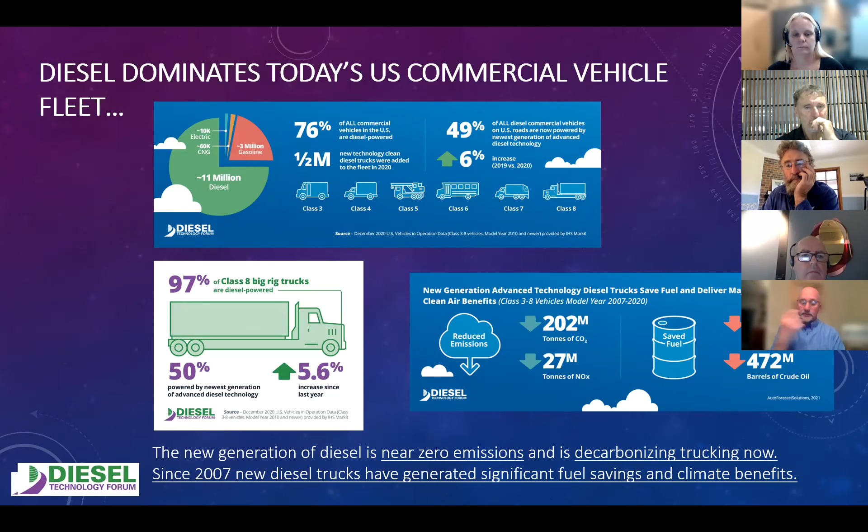So the benefits of new technology that are being delivered to society, as well as those who are using the technology, are significant. And we try and think about those in interesting ways. That's one of the fun parts of our job here.

For example, we can say that all these new diesel trucks are the equivalent of removing the CO2 emissions from 43 million passenger vehicles from the road for a year, or making those all zero emission electric vehicles. Or it's equal to a wind farm with 42,000 turbines, about 5 times the size of Washington, the nation's capital.

So when we think about getting solutions for climate change and CO2 reduction, we encourage folks to think about, we should value all of these reductions, no matter where they come from or in what form. So using the most advanced diesel technology does deliver some pretty significant benefits.

So let me focus a little bit more on the ag sector. I know that's one that you're particularly interested in. And we've already covered a number of the different aspects of diesel's role in the ag sector, and they're, I think, probably very much aligned between our two countries.

Not only in producing the feedstocks and the harvesting and planting of the crops, but transporting of the product, pumping of the water that's needed, and throughout the entire supply chain, diesel has a key role, whether it's moving the grain from the farm elevator to the grain storage facility, to the rail yard, to the inland waterway barge, and so on, and then ultimately to grocery stores around the country.

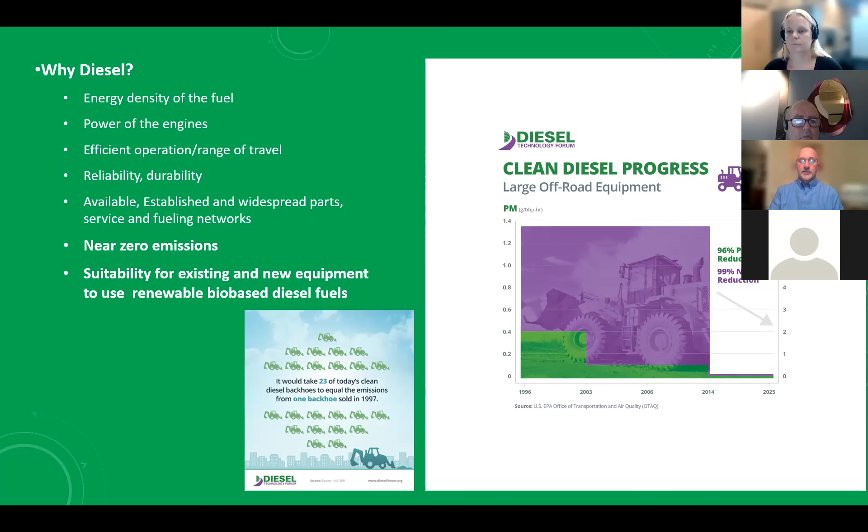And just to put that in perspective, it would take 23 of today's diesel backhoes, or kind of a medium-sized row crop tractor, to equal the emissions of a single backhoe sold in 1997. So you start to get the sense that, wow, the technology has really changed over time, and that is exactly right. That value proposition is one that we have to also remind folks of on the on-highway side.

We have over 140,000 stations in the U.S. that have diesel fuel available, and we have this whole deal with compatibility with these renewable and low carbon fuels. And there are some other attributes as folks are looking at different ways to decarbonize transportation, and particularly trucking gets into the mix there. So the value proposition for diesel is very hard to beat.

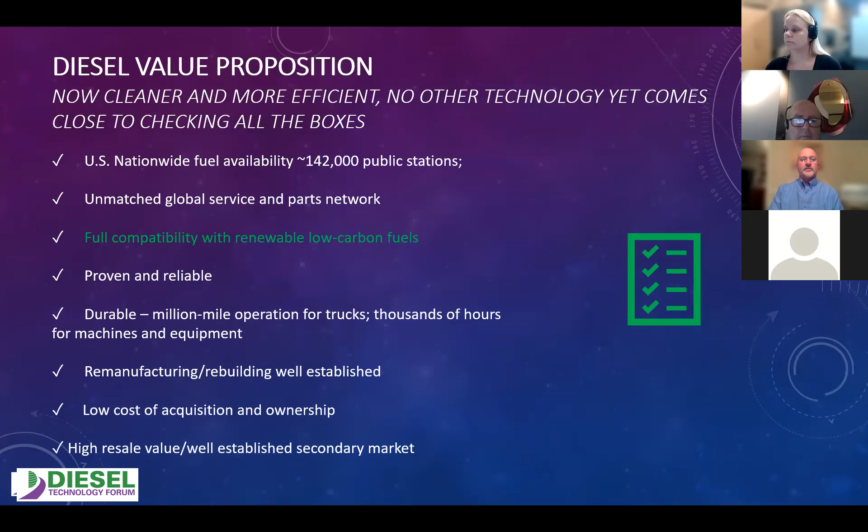As I like to say, it checks all the boxes of what people need today and what they're planning for in the future. Now, turning to that future, though, we all are understanding that some new fuels and technologies are emerging.

For the ag sector, we know that diesel is the prevalent fuel today, but in the future that's likely to change to some extent. What are customers requiring in the ag space today? The same things they've always required: I have to have fuel to do my work, fuel that's affordable, and a way to run my machines and equipment to do my business, whether it's planting crops or harvesting. There's a whole range of requirements customers have and will continue to have in the future.

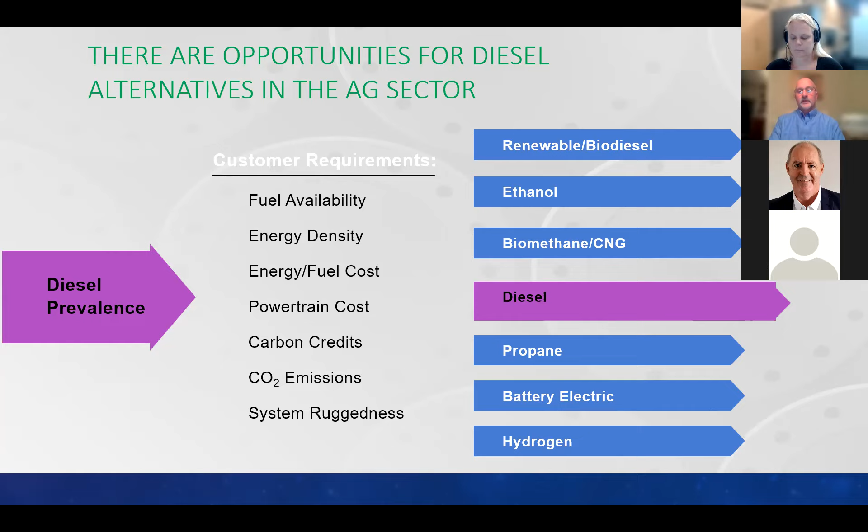So what are the three things driving diesel forward today? This is not just in the US, but globally. First of all is greater efficiency. We're seeing a tremendous effort to make current diesel engines even more efficient.

That's because of new requirements on greenhouse gas from EPA and the Department of Transportation, directing further improvements in fuel economy from heavy-duty vehicles. We're in the second phase of that now. It's happening. It's real savings for real truckers.

And we're seeing some breakthrough kind of things. For example, just last fall, a joint industry-government partnership known as SuperTruck achieved a 55% brake thermal efficiency in the laboratory, which is a pretty significant accomplishment. That means 55% of the energy used in a diesel engine would be applied to useful work, as opposed to lost to heat or some other waste stream. Considering that gasoline engines are in the 30s or so of brake thermal efficiency, it's a pretty big deal.

So we are seeing continued investment to make the combustion process in diesel engines and vehicles more efficient. The second aspect of getting to the future is lower emissions. It's not good enough to be near zero - we're going to be even nearer to zero, and that's coming in the not too distant future here in the US. This may have other ramifications on a global basis.

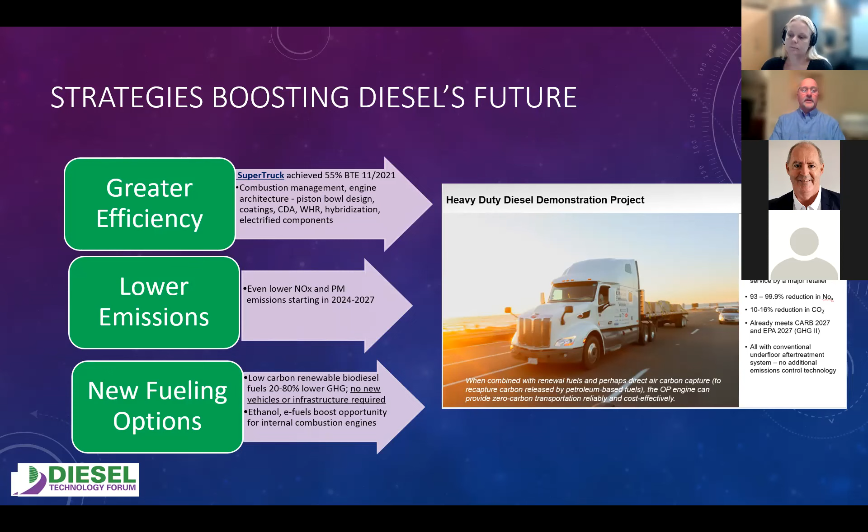And then lastly is these new fueling options. So that's about how we make the diesel engine better - we know how we're doing that in the engine, but what about the fuel? The diesel fuel has not changed in the US since 2006, when ultra-low sulfur diesel was first introduced. So I think there's a tremendous opportunity on the fuel side here that we haven't fully realized yet.

So let me spend the balance of the time talking about renewable fuels and give you some perspectives that we have here in the US on that.

So why are people more interested today in renewable biodiesel fuel than ever before? I'll state some of the obvious, and I'll be interested in your comments and perspective as well. First and foremost, we are all part of the team to decarbonize our global economy and attack the climate change challenge. Here in the US, our president has set a net zero carbon emissions by 2050 goal. And our transportation sector is now number one in greenhouse gas emissions.

Not only has transportation emerged as a big part of the pie, but federal policy is very clear at this point, and we also now have a number of states adopting their own goals. For example, New York State has set their own goal of 85% reduction in greenhouse gases, and probably a dozen other states have done the same. So we're seeing a very activist policy climate here.

We also have the influence that is growing throughout the world for our member companies, and that is the corporate environmental, social, and governance efforts - the ESG concerns - as investors and public interests start to ask more questions about how specific businesses are managing the climate risk within their portfolio and how they're reducing their impact on the climate.

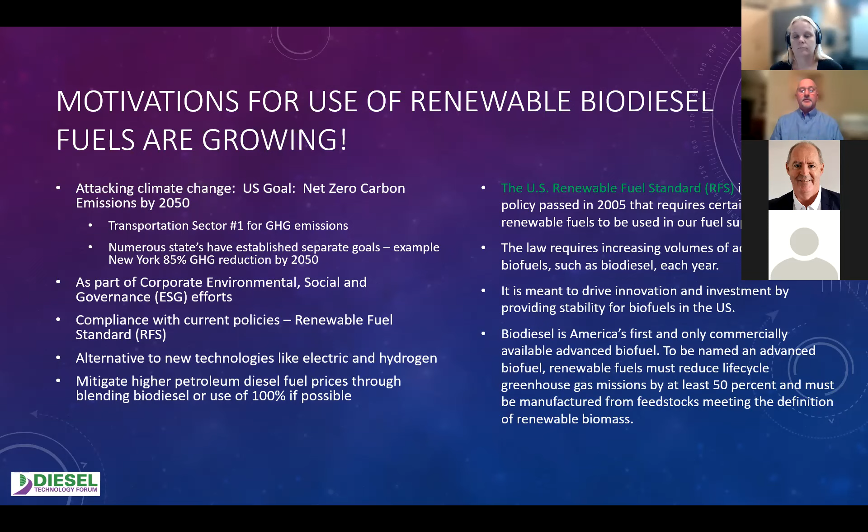The last thing here, and the most recent one in present day, is using more biofuels mitigates the higher diesel fuel prices we're all experiencing because of some of the issues evolving out of Ukraine, the war with Russia. Part of that is driving up energy prices, and diesel fuel is top of the list there. We're seeing diesel fuel here in the US at over $5 per gallon, the highest we've seen on record. So it's got a significant motivating factor there. One of the solutions to that is to use more renewable fuels if you can. So these are the main motivating factors for getting folks towards renewable fuels.

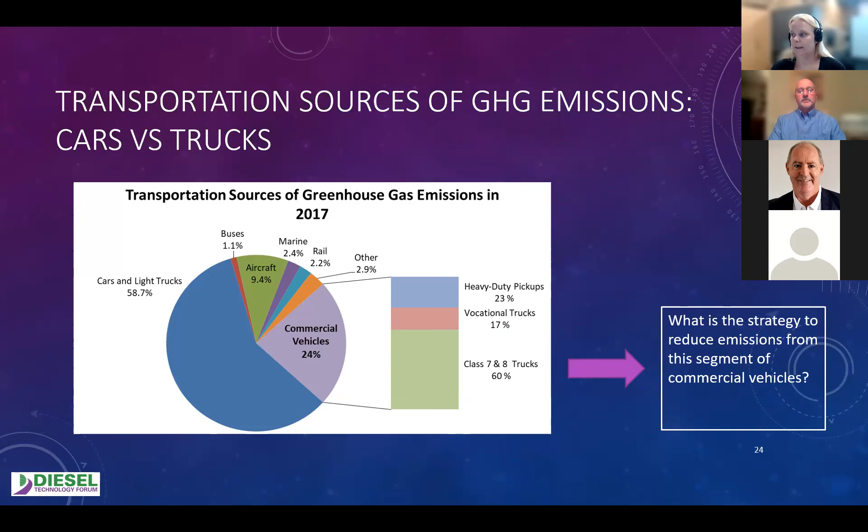If we dive into our sources of transportation emissions a little further in the US, you get the sense that heavy duty trucks are a big part of that. The off-road engines and equipment are also a part, but a smaller part. And that's why there's been so much of a focus on electrifying the heavy duty vehicle fleet in the US, because it is the largest single source outside of passenger vehicles of CO2 emissions.

Just 2 years ago, transportation surpassed electricity as the number one source of greenhouse gas emissions. So all these things have come together to compel progress here in the US on reducing greenhouse gas emissions. The Biden administration has a 50% reduction in greenhouse gas by 2030, and then the net zero carbon by 2050 that I mentioned before.

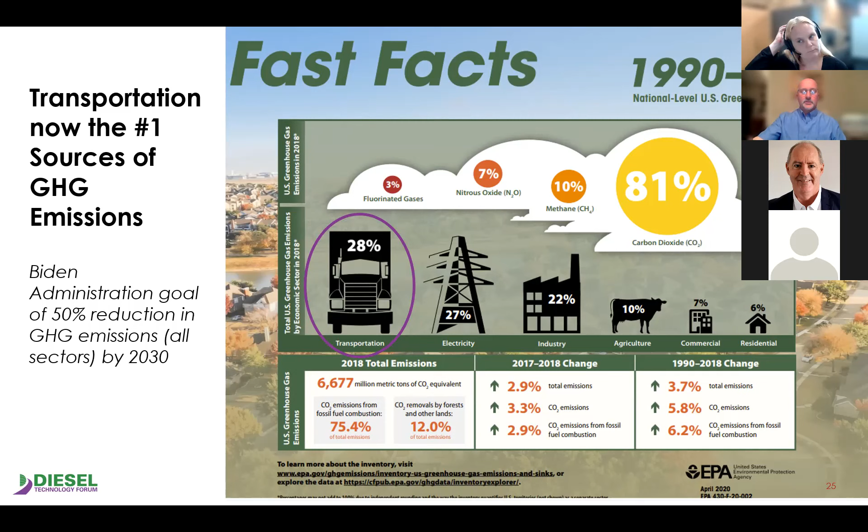So what is the opportunity for renewable fuels? When we think about these fuels here in the US, we think about how they can reduce greenhouse gas emissions pretty quickly by a range of anywhere from 50 to 85%, depending on the feedstocks that are used to produce the fuel. And just to level set everyone with what we're talking about, the feedstocks principally are animal fats and vegetable oils.

These are the same, but the processing is different. And that's where the divergence takes place between what is traditional biodiesel on the bottom, which results in the fatty acid methyl ester, the FAME kind of fuel that we talk about, or the renewable hydrocarbon diesel depicted on the top line, which is a non-esterified renewable diesel product. It's a very paraffinic kind of fuel, and is what we consider to be a drop-in replacement for conventional petroleum diesel in the US.

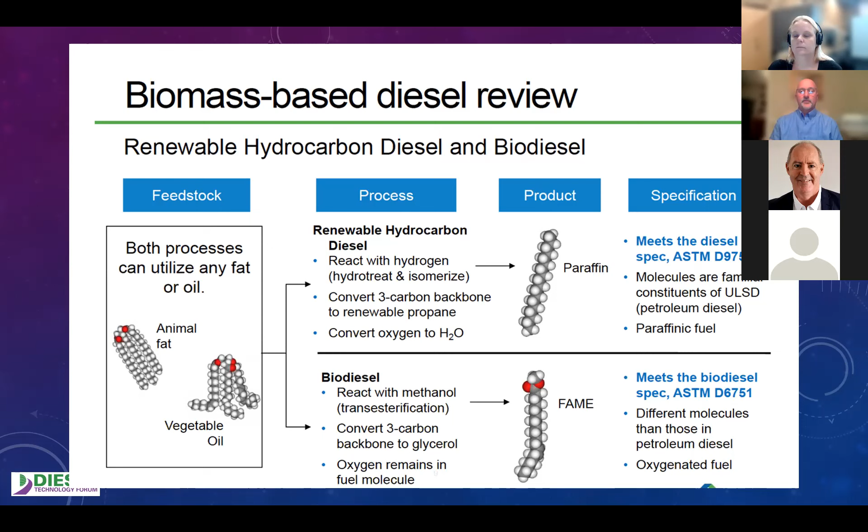Now, I'll give you a glimpse of what we're seeing here in the US, what the production, feedstocks, and markets are looking like, what folks are interested in. On the production side, last year, about 3 billion gallons of biodiesel or renewable diesel were produced. They had a capacity of slightly more than that. The industry's expectations are that this is going to grow to nearly 5 billion gallons by next year, and that's I think a pretty reasonable estimate.

You get a sense of the feedstocks here, that soybean is making up the largest portion of the biodiesel, renewable diesel feedstock at just more than half of all of it. And then the balance make up the feedstocks almost equally. I'll share some more insight on that in a second.

The markets in the US for renewables are anything that can burn diesel fuel. And we haven't, I would say, necessarily, with the exception of the states with the low carbon fuel standards, we've seen renewable diesel fuel used in all kinds of different applications, and I'll share some insights on that in a second. And the policy drivers we've talked about a little bit: the renewable fuel standard that provides a federal tax incentive of $1 blender's tax credit per gallon of fuel produced. Obviously, this is a major support system for the market at the moment. And then there are these other policies that are emerging on carbon and state mandates.

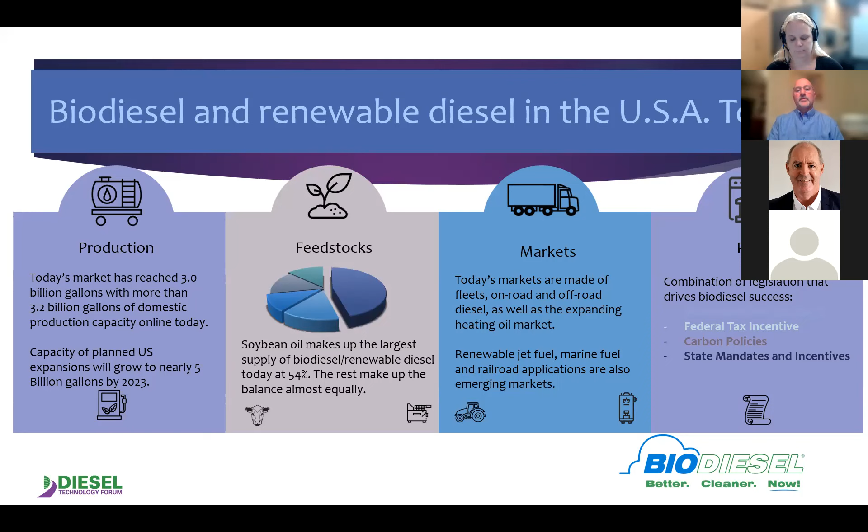So at the moment, this is what the sector looks like here in the US, and it has grown quite substantially over time. You get the sense that we've had some pretty rapid growth in production of biofuels in the US market in recent years. So the opportunity to produce more seems entirely consistent with where we've been coming from.

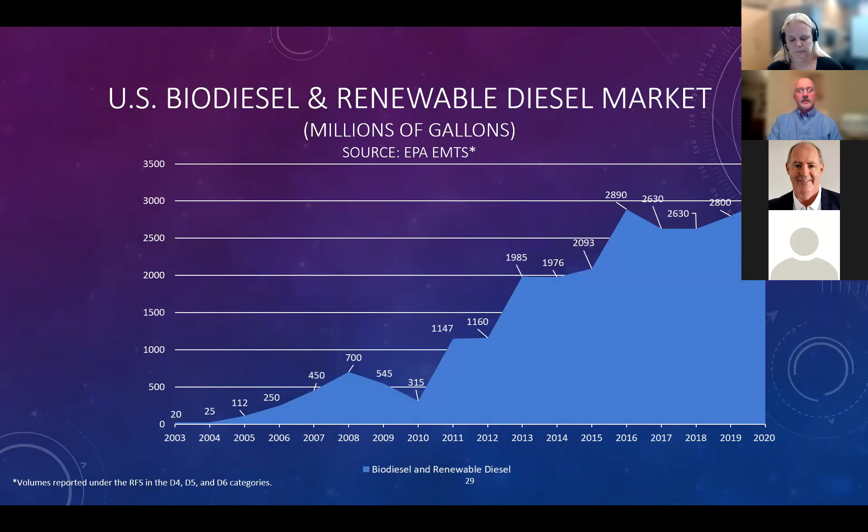The industry vision has been updated since the first slide I showed. This is the most current version of that. I just share that shows that they're looking at 6 billion gallons by 2030, and if all goes well with feedstock, we could be talking about 15 billion gallons by 2050. So to put that in perspective, here in the US we use about 44 billion gallons of diesel last year, plus or minus a little bit. So we're looking around 3 billion gallons produced, 44 billion gallons of diesel consumed.

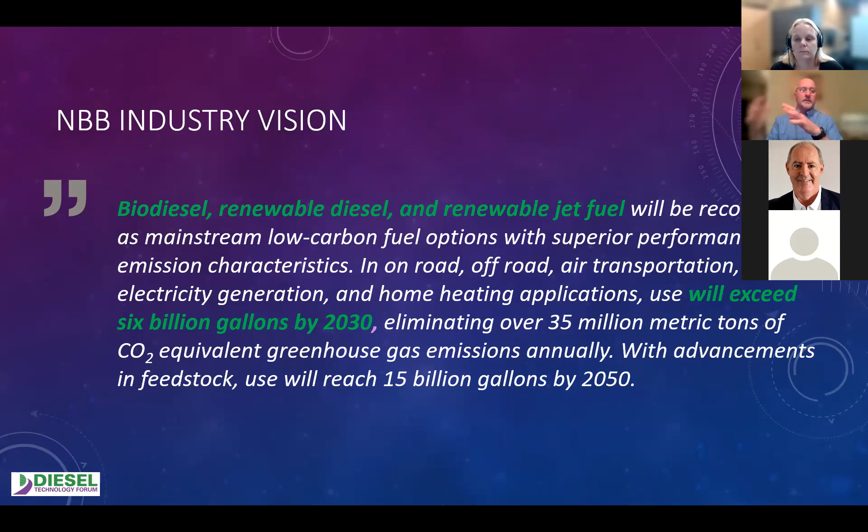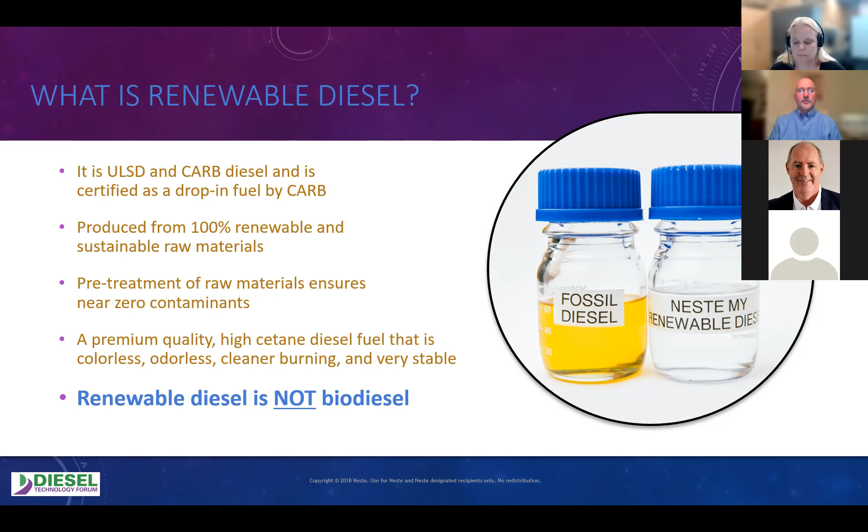So to focus on renewable diesel for a second, this is a slide from Neste, which is one of our member companies and is a global leader in producing advanced renewable biofuels like Neste MY Renewable Diesel. You get a sense just from the visual here that it's a fuel with a much higher level of purity in terms of contaminants that exist. It has very high cetane level, very favorable ignition properties for both new and existing diesel engines. And it is not biodiesel. So just to make that clarification from the previous slide, it offers some advantages over biodiesel in terms of stability and longer term storage and some other properties when burned in some kinds of diesel engines.

The benefits from renewable diesel have been established very well by Neste and some of the other producers. Traditional diesel fuel cetane minimum in the US is 40, which is extremely low, we would say. Higher cetane means better ignition properties of the fuel, which means more complete combustion, and it's actually a better driving experience as well, if you've experienced that.

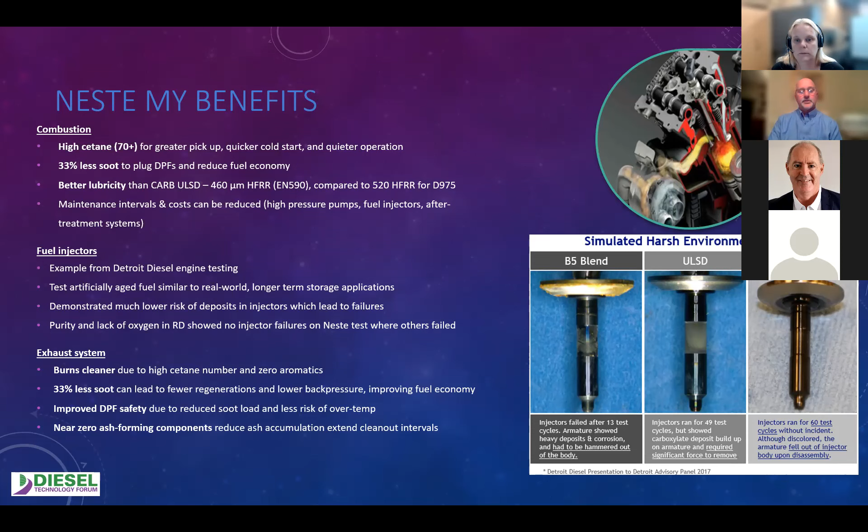This just gives you an example of some of the implications of using these different levels of fuel, and how renewable diesel might hold an advantage over some other biodiesel types of fuel.

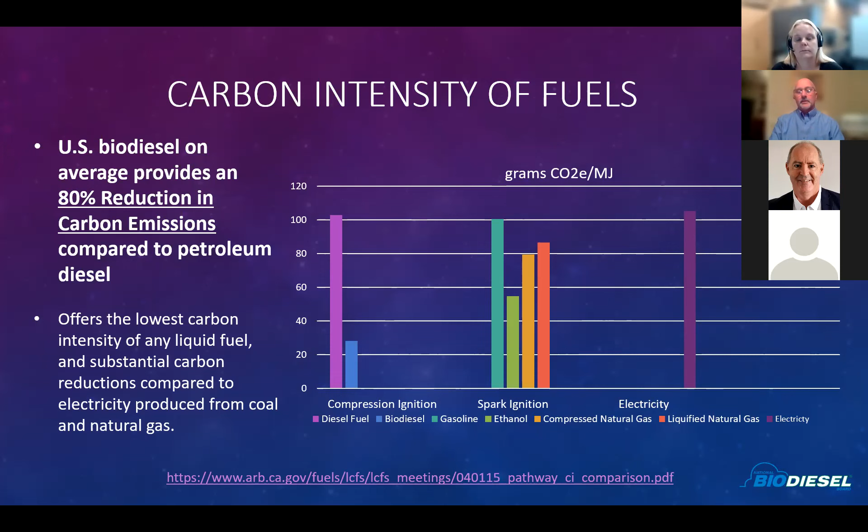The experience of using renewable diesel fuel in the US is very strong and growing. We've been talking about renewable diesel a lot for the last 5 years easily, and we have really some great success stories. Most of them have been driven out of California, because that's where they have a low carbon fuel mandate, and that's where most of the product is today.

This just shows some anecdotal examples of how some cities are utilizing this fuel as part of their day-to-day operations, and what it has meant to them. If you're ever in the San Francisco Bay Area and have the chance to ride the red and white ferry from different parts of the bay to another, you'll get an opportunity to experience this.

That ferry fleet switched to 100% renewable diesel overnight and saw their CO2 emissions cut by 22,000 tons a year. So it can have a pretty significant impact pretty quickly, principally because it does not require any new fueling infrastructure or vehicles to deliver these benefits.

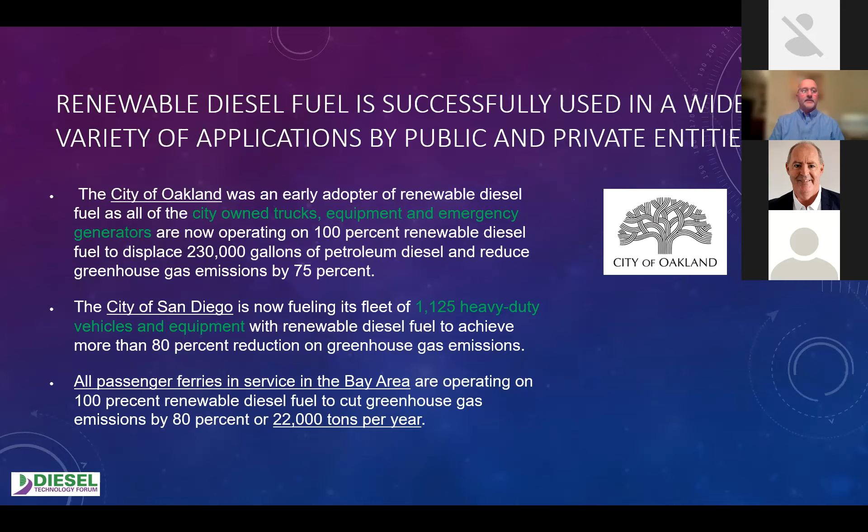And the city of Oakland also thinks about this in the concept of a circular economy, which I think is also increasingly important. They have a system of collecting the local raw grease from restaurants in the Oakland area through contracted vendors that pick up that supply.

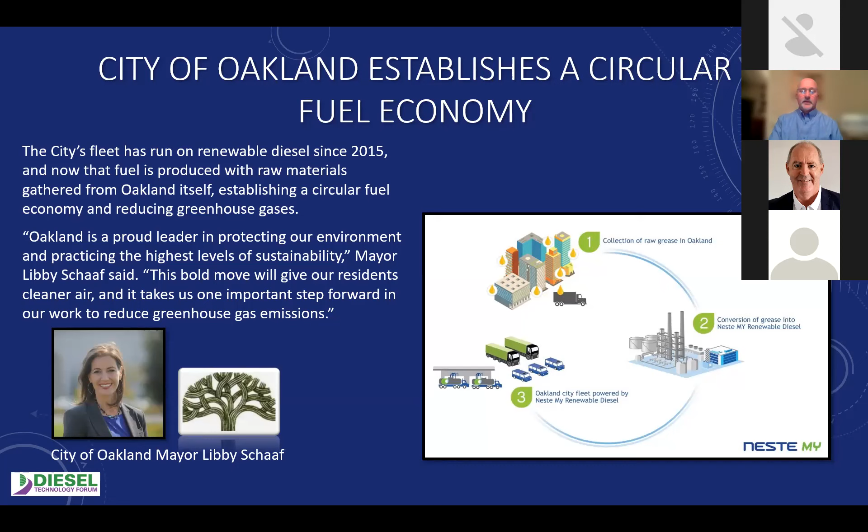And they're using it in all kinds of different vehicles and equipment, so it's not being kept on for the lightest of tasks. They're using it in their service vehicles, their fire trucks, etc. So it's quite a good story from their perspective.

I mentioned the ferry fleet already. The other place we've seen renewable diesel fuel really take hold in the US, in California, is as an option for Pacific Gas and Electric. As part of their wildfire management strategy, they have what they call public safety power shutoffs.

When weather conditions get to a point where they're anticipating the possibility of high winds and dry conditions that might be amenable to wildfires, and I know this is of interest to you all as well, they might shut the power off from the grid.

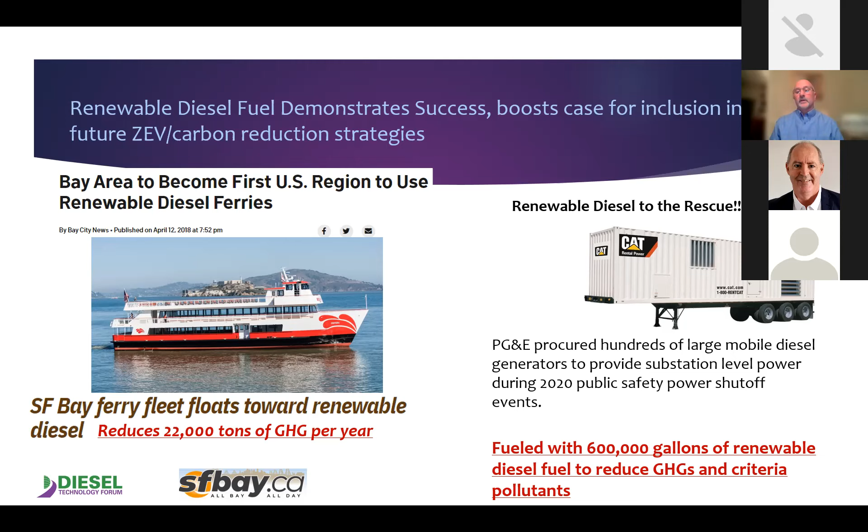When they do that, they have to find a way to power certain parts of the state that they can't serve with the transmission lines. So microgrids and the use of backup large mobile generators can provide that kind of capacity. And to make them more amenable to the public and reduce emissions, even though they might only be used for several hours or a few days depending on weather patterns, they use 100% renewable diesel fuel.

We see this fuel used in all kinds of different places. I mentioned the city of Oakland, but New York City is also sticking its toe in the water here, and it's already seen some good benefits. They're using it in 13,000 trucks. So we see a lot of success for renewable diesel products, but it's really a California phenomenon largely. We hope that's going to change soon.

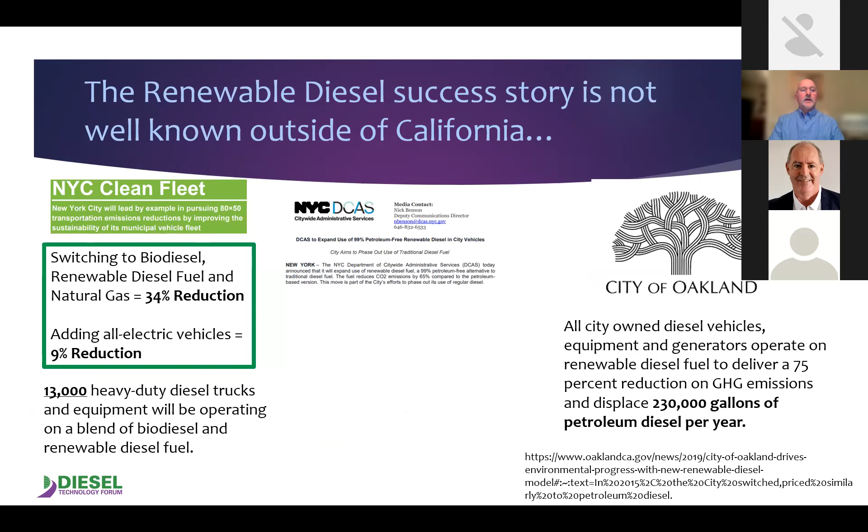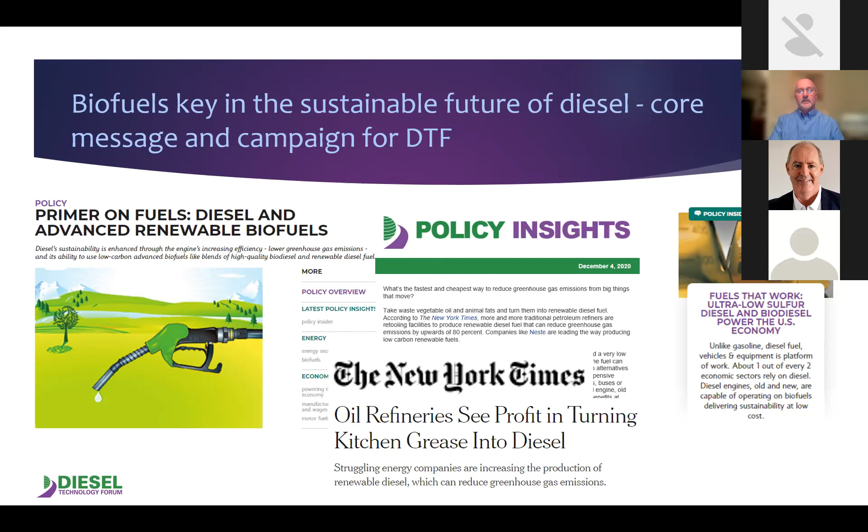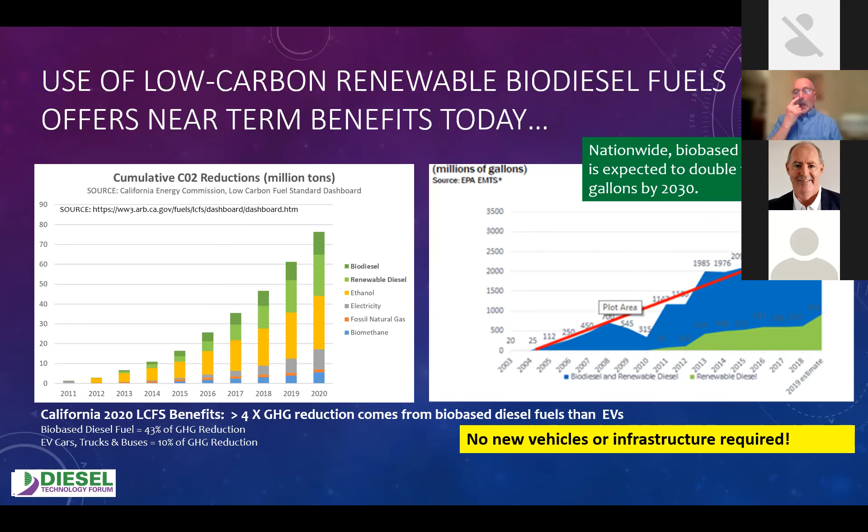Some people immediately think, oh California, all those electric cars must be reducing greenhouse gas emissions, that's where the benefits are coming from, we just need more electric cars to reduce CO2. Not exactly the case. In fact, most of the CO2 reduction is coming from biodiesel and renewable diesel fuel, and then ethanol as well. So if we're interested in reducing carbon on a near-term basis, these fuels and technology have tremendous power to do that and are available as well.

One of the main things that's going to boost the capacity of renewable diesel in the US is that in the last few years, conventional oil refinery producers have gotten interested and are beginning to invest in this process. We have members including Phillips 66, Renewable Energy Group, and Neste that have all announced new capacity, supplies, or joint ventures in recent months to produce more renewable diesel across the US. You get a sense here that the planned, operating, or under-construction refineries are definitely going to bring more renewables online in a short-term period. That will be good to boost the opportunity for using these fuels outside of California.

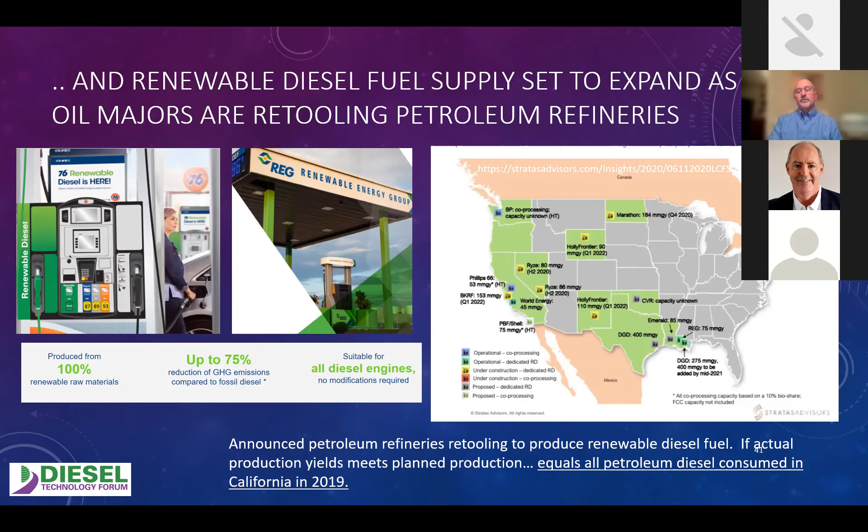You get a sense in the black in the middle how U.S. electricity is generated. In certain areas like the Hawaiian Islands, the wells-to-wheels CO2 production is very high because they have pretty much total reliance on fossil fuels for generating electricity. If you go into California, on the other end of the black bar scale, they have a very high degree of renewable energy as part of their mix, so they're much better off on the wells-to-wheels CO2 production.

Looking at different kinds of electric capacity, you can compare to the blue lines on the cluster on the left, which shows the basic soy biodiesel's wells-to-wheels CO2 profile compared with California grade diesel in that same grouping. They're very close, but CARB diesel actually has higher CO2 emissions than B20 or B5 biodiesel in that case. Similarly, on the far right, where are we getting natural gas from? Renewable natural gas or shale natural gas also have different profiles. As we think about different strategies for decarbonizing different sectors, all of these fuels are being considered, so it's important that we look at them all in the same way.

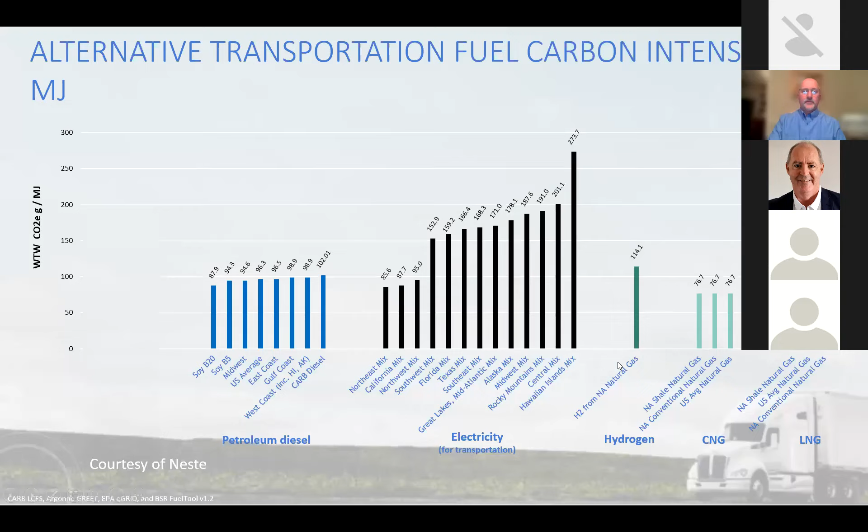Looking a little bit at the low carbon fuel standard, how is California getting its low carbon fuel standard feedstock fuels? Where are these coming from? This shows where the credits are being generated, what's coming from soy, what's coming from distillers corn oil, from tallow, and from some other sources.

So you get the sense that different parts of the biomass, different crops and residues, are playing different roles over time in the biomass-based residues that are part of the low carbon fuel standard in California, in terms of where the credits are coming from.

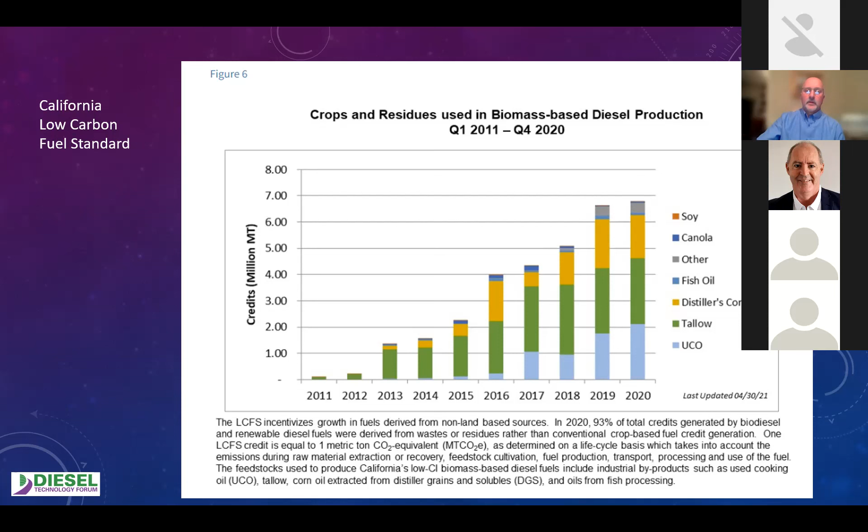I just wanted to share this because it gets into forecasting a little bit. The Advanced Biofuels Association here in the US commissioned a study from LMC to ask whether there are adequate feedstocks to meet the US goal of reaching 21 billion gallons of biomass-based diesel to replace fossil fuels by 2040. Different organizations and associations are exploring different rules and models for growth, and this is one from the Advanced Biofuels Association. To hit that goal means they need 9 billion gallons of bio-based diesel by 2030.

So they asked whether that's possible based on the current lipid feedstocks available. LMC surveyed this and found substantial growth in global oils and fats that will be available, which should be quite adequate even after factoring in demand for food and other uses. So there should be enough lipids to meet these higher goals for biodiesel fuel production. You can download this study and look at the methodology yourself online - I recommend it.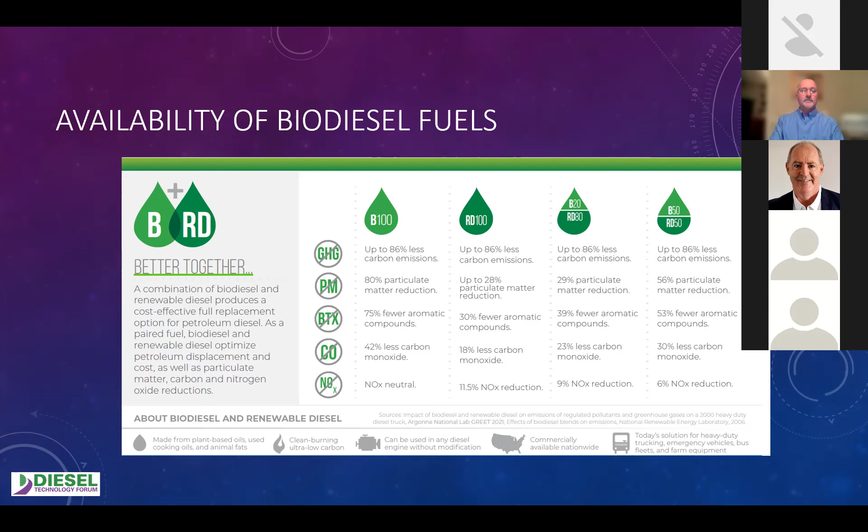One thing we're trying to talk about a lot more in the US, as we see advancements and pushes for other policies, is the time value of carbon. What's the value of removing carbon today versus waiting for a fully electrified power sector that can charge heavy duty trucks in 15 or 20 years? The use of renewable fuels can have immediate impact, and getting more carbon out of the atmosphere now paves the way to achieve the bolder objectives we have for meeting the Paris Climate Accords in the future. So if we really care about removing carbon from the climate today, the way to do that is to use more of these advanced low carbon renewable fuels.

As we think about the future of diesel, the use of more renewable fuels is really a key part of it. What if we have diesel engines that aren't running on diesel fuel? Going back to John's earlier comment, maybe it's not the engine that's the issue, maybe it's the fuel. What if we start using different kinds of renewable fuels in the diesel engine and take advantage of the inherent energy efficiency of compression ignition technology and all the benefits it brings? So this is really a cornerstone of how we're communicating about this technology in the future.

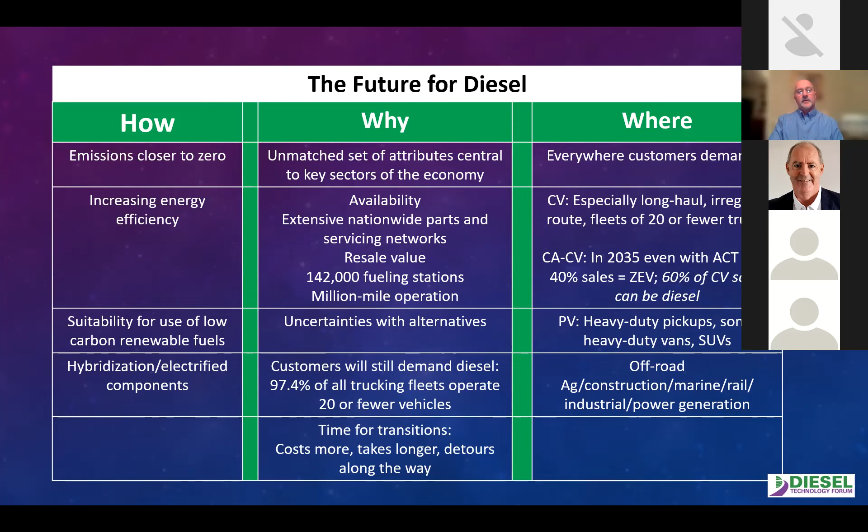But I think we have to be realistic that there's a lot of pressure for other kinds of fuels and technologies. We see a lot of interest in compact electric construction equipment, for example, and that seems like a really good application. Same thing for last mile delivery vans in urban areas — great applications for all electric, limited range, lightweight loads, come back every night. That makes a lot of sense. But if we're talking about long distance, heavy power demands over extended periods of time, will any of these alternative fuels be able to meet or match what diesel can do?

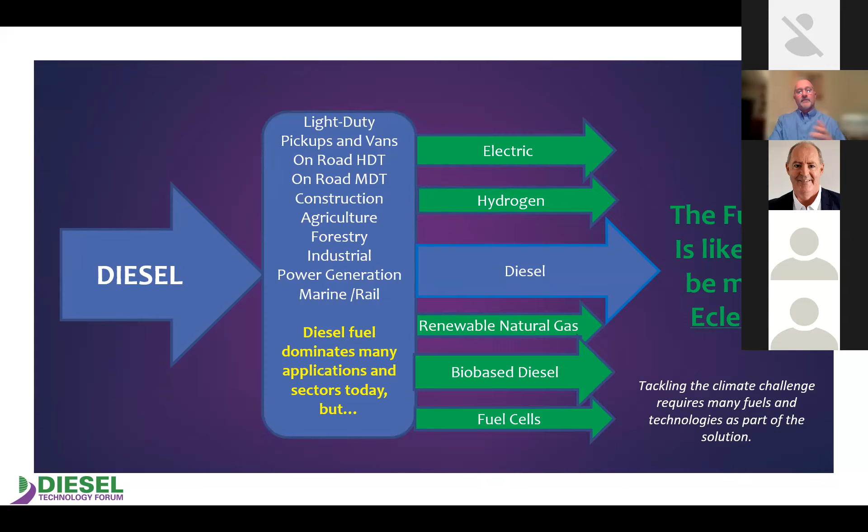It remains to be seen, honestly. So we do think that the future is likely to be more eclectic than electric, and I think that's okay. We're going to find that these fuels find their way into the right sectors for them.

So just to wrap up here, diesel is going to continue to play key roles in main sectors of the economy. Changes to the transportation paradigm and clean energy are going to take longer probably and cost more than we project. There's going to be some bumps along the way, and users still have a lot of aversion to risk out there, particularly right now.

So using advanced renewable fuels that take advantage of the equipment users already have makes managing that risk a lot easier. The advantage of renewable biodiesel and renewable diesel fuel is you've got all the equipment you need and can start using that fuel tomorrow. You don't have to invest in new infrastructure, and you don't have to buy a new engine, vehicle, or equipment type. So it's really a tremendous advantage there.

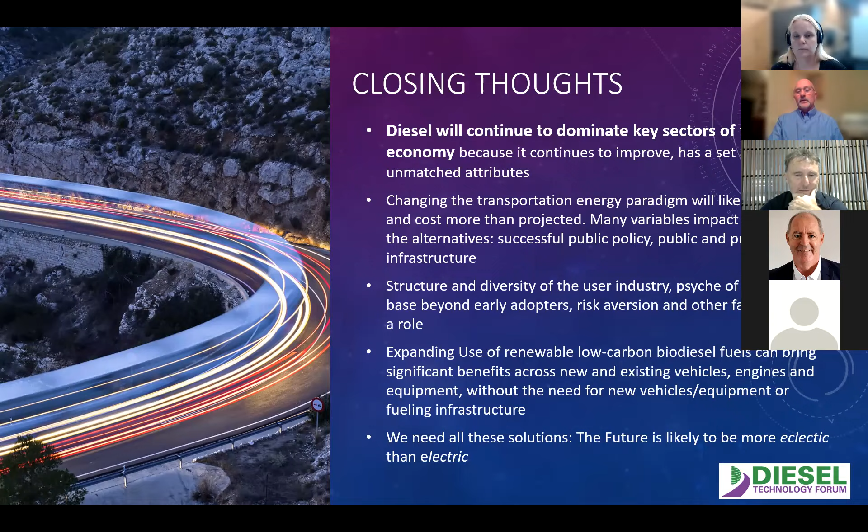So with that, I've extended my commentary here quite substantially. Let me stop and answer any questions that you have.

Thanks, Alan. We've got quite a few questions. The first is: did you give a sense of the percentage of irrigation powered by diesel in the US, or did you go over this?

I did not, but it's definitely declining, particularly in California, the number one ag state. There have been substantial efforts over the last two decades to electrify agricultural irrigation pumps. In California in particular, I'm pretty familiar with the fact that a good number of those have been converted to all electric. As for the rest of the country, I'm not sure about that.

Thanks. The next question is: what is the average cost of production for renewable diesel and biodiesel, and how does this compare to fossil diesel?

Well, now that is a really excellent question. Keep in mind that, as I mentioned, today at the pump we're seeing roughly $5 a gallon for highway grade diesel, including all the federal taxes and other things — so let's say $5 and change. Before the pandemic and the current situation with the war in Ukraine, diesel fuel in the US was running about $3.20, $3 something a gallon. And renewable and biodiesel fuel is actually very close to that in terms of at-the-pump cost.

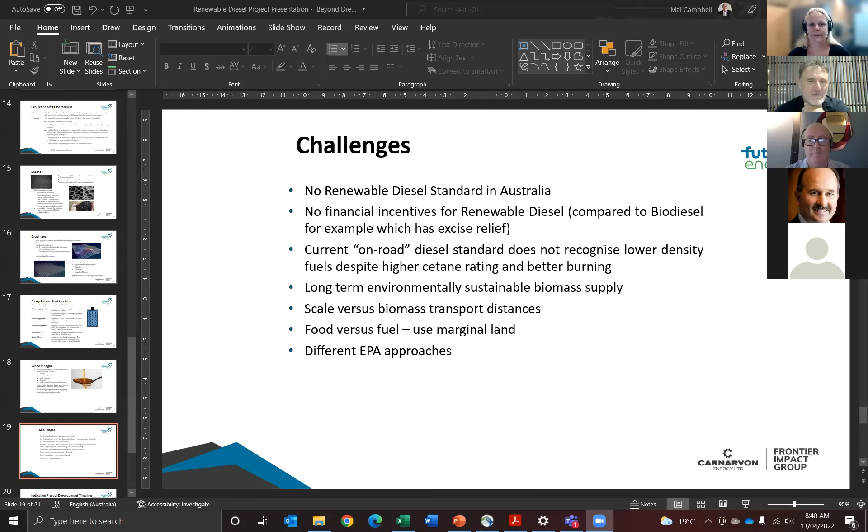No problems at all, I'll just share my screen and see if that'll work. Whereabouts are you located today, Mal? I'm actually in Perth, travelling over, but I'm based in Port Macquarie in New South Wales normally, right across the other side of the country at this point in time. Just working on our first project, so that's the reason. Natasha, can you help me with sharing my screen, please? Oh no, I've lost you. Here we go. All right, try now. Looks good. It looks like it's coming on. Awesome, okay, we'll start from the beginning then. Good on you, right, away we go, Mal.

Thank you, thanks for the opportunity, John, to talk. I'd like to thank Alan for his presentation, it's given me a lot of food for thought and fortunately he's answered some of the questions. We've got equally the same challenges in Australia, and probably a little bit more, to be honest, in terms of getting things happening. The US has made great strides in that area. So I'm going to talk to you about renewable diesel and what Future Energy Australia and Frontier Impact Group are doing in Australia, looking towards supporting fuel security and net zero carbon for fuels. Future Energy Australia is a joint venture between Frontier Impact Group and Carnarvon Energy.

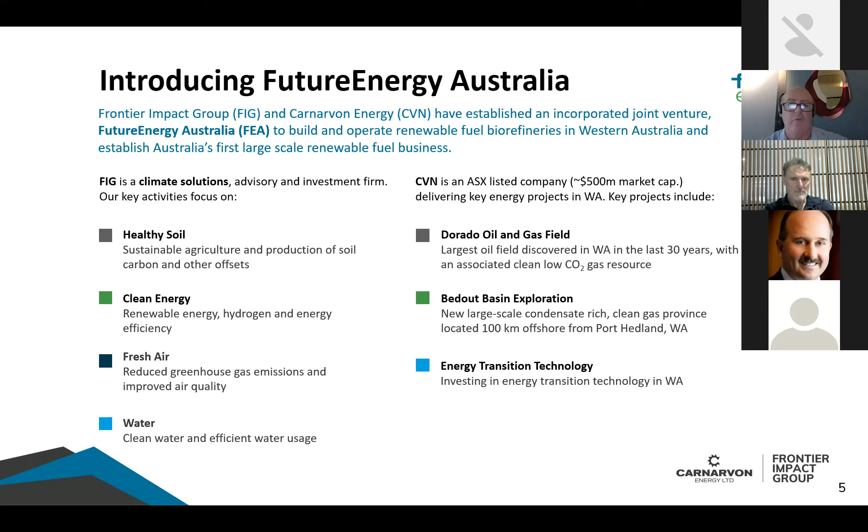Frontier Impact Group is our climate solutions advisory firm. We're looking at a whole lot of sustainable approaches to agriculture, energy, air emissions, and also water. Carnarvon's a listed ASX company which has got the Dorado oil field in Western Australia, a number of other oil exploration points it's looking at and looking to develop, but it's looking to pivot and transition. It's got a net carbon zero target, and this first step is actually this joint venture with us in energy transition technology in Western Australia.

Before I start, I'll talk about what renewable diesel is, and Alan covered a fair bit of this already. The first point is it's not biodiesel. It's a diesel produced from renewable biomass-based feedstock, so biogenic feedstock, and it's got properties consistent with petroleum oil-derived diesel fuel - not entirely consistent, but very close. Unlike biodiesel, which has some other inconsistent properties, it can be used as a direct replacement for diesel with no equipment modifications. Physically it can, though there are some other challenges around that which I'll talk about later. The technology we're using to produce renewable diesel produces a diesel that has been certified to US and European diesel standards, and tested to New Zealand diesel standards and the Australian fuel standard for automotive diesel.

It's also been tested to the Caterpillar specification. There's one area I'll talk about later, relating to density, which also relates to cetane rating, which Alan mentioned before with Neste. For example, Neste fuel, the same as ours, would not meet the Australian fuel standard for automotive diesel on density. So there are a few challenges in Australia we need to look at in terms of making it more prevalent. But there are still a number of options, because that Australian fuel standard for automotive diesel only relates to on-road use of diesel. I'll talk about the testing in more detail a little later.

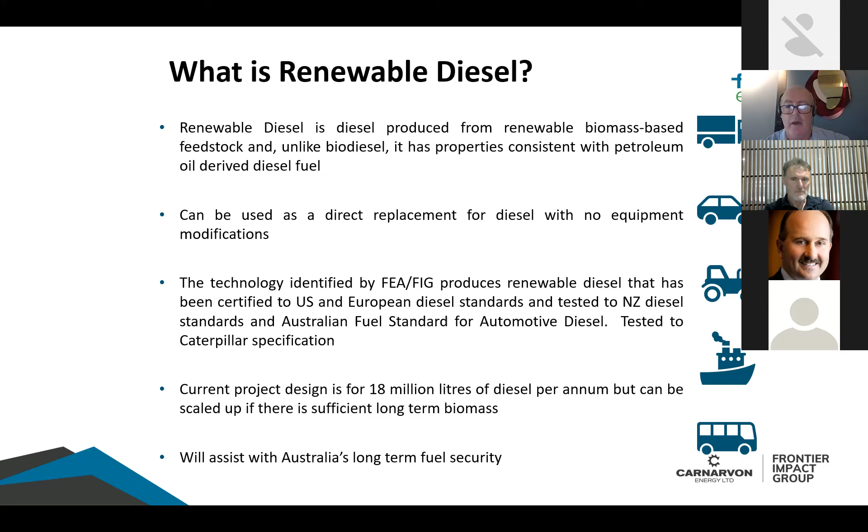So John mentioned Renuleum. We've created this to avoid confusion around biodiesel versus new renewable diesel, which isn't biodiesel. We've created a new fuel brand we call Renuleum, and we've also named our subsidiary of FIG involved in producing the renewable diesel, Renuleum. So that's basically producing a fuel with a higher cetane result, cleaner burning, and greater engine performance.

Alan's done a great job referring to Neste. We have similar results and performance to Neste, albeit our feedstock isn't oil-based - it's actually a lignocellulosic feedstock, so woody biomass, crop residues, that type of stuff. It's also got very low sulfur and aromatic content, and can be blended with petroleum diesels or other biofuels to create a drop-in fuel that meets Australian standards. There's a number of avenues for renewable diesel under current legislation, but we'd certainly prefer a much cleaner path for renewable diesel to stand in its own right.

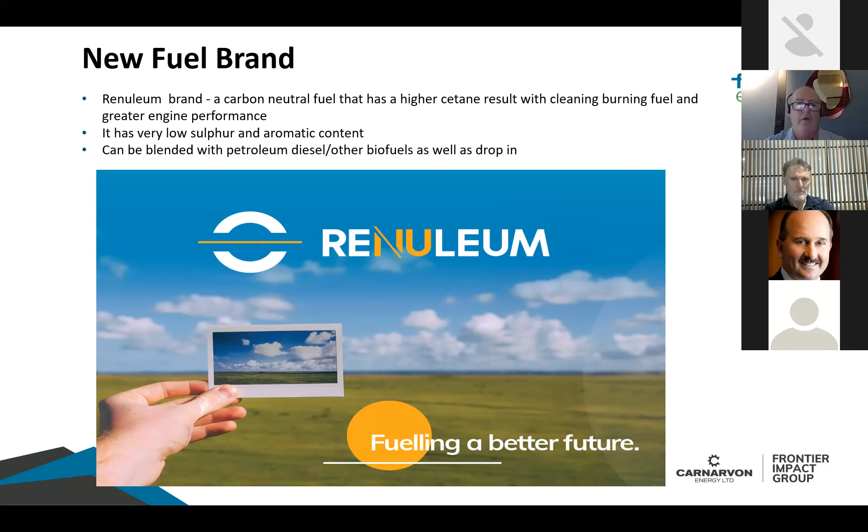Our initial facility is likely to be at Narrogin in Western Australia, in the wheat belt. That's going to use waste biomass from plantation timber, stumps, and other residues from plantation biomass projects. That project is due to come online in late Q4 next year and be finally commissioned in early 2024. That's the first of 20.

A typical project, like our Narrogin project, has a capital cost of about 110 million. The technology is modular, and we've targeted at least 4 modules to get some economies of scale. But with more feedstock, we can get further economies of scale and produce 5, 6, 7, 8, 10, 11, 12 modules on a plant. So it's fully modular, and we can increase the scale quite readily.

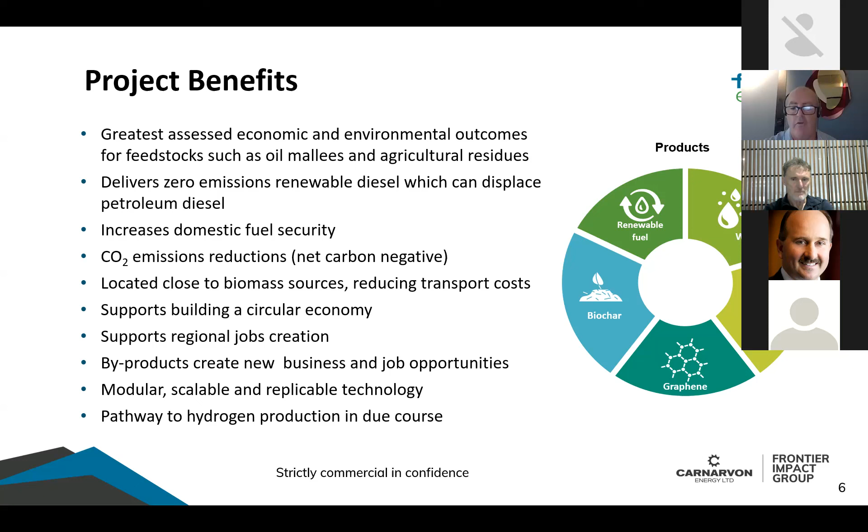So we've got 55,000 dry ton equivalents of biomass in wood chip form. We don't need it in wood chip form - eventually we can have it in a number of different forms, but we'll chip it ourselves, not to the standard required for overseas export. It'll actually reduce carbon emissions by more than 70,000 tonnes per annum.

That's our particular process. Wood chip export does nothing for Australia. It may, if it's burnt as material in power stations overseas, reduce emissions overseas, but it does nothing in terms of reducing Australia's emissions content.

If you're avoiding burning biomass - this isn't related to wood chip, but more to crop residues - you're potentially saving about 100,000 tonnes per annum of carbon emissions.

The big important thing I want to highlight is the value-add from our process: for each of those 55,000 tonnes of bone dry equivalent biomass, we're adding $900 per tonne in value and producing $45 million in economic revenue, whereas that same 55,000 tonnes, if exported, would produce about $11 million in revenue.

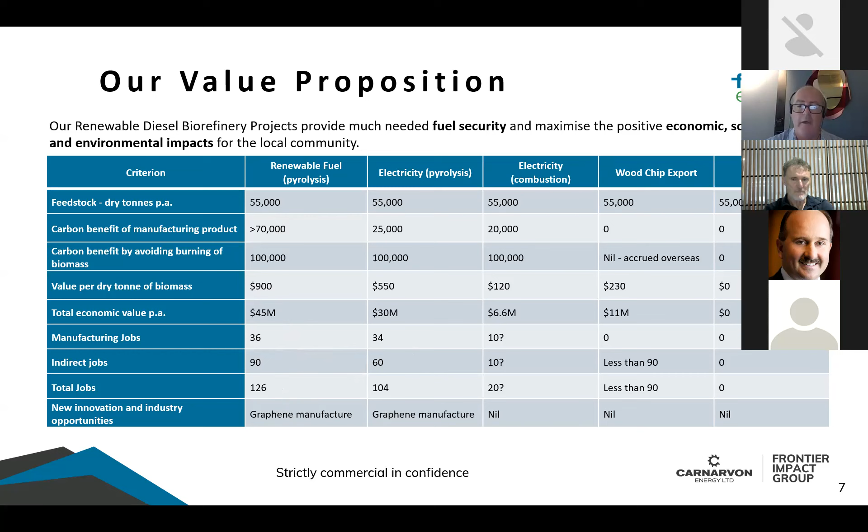It's net carbon negative. We've done a comparison using a life cycle assessment that was previously done - based on a study conducted in Canada on the technology by an independent consultant, using Canadian greenhouse gas inventory data. We translated some of those results into the Australian context, and it reduces the carbon intensity by a massive amount, to the extent that it is carbon negative.

So basically, how can you be carbon negative? We take what it takes to produce well-to-wheel petroleum diesel, and compare that to the emissions from our process. So if you like, it's tree-to-wheel versus well-to-wheel, and it's significant.

The other important thing is emissions bang for your buck in terms of land area. In the West Australian context, the emissions we're reducing is equivalent to a high efficiency 110 megawatt solar farm, but we only occupy 2% of the land area of a solar farm. That gives you an equivalent aspect.

We've got an independent study currently being done on a full life cycle analysis, which will do it fully in the Australian context. Our own internal study has just translated the Canadian study into the Australian context. So we'll be able to prove that we are a fully carbon negative project.

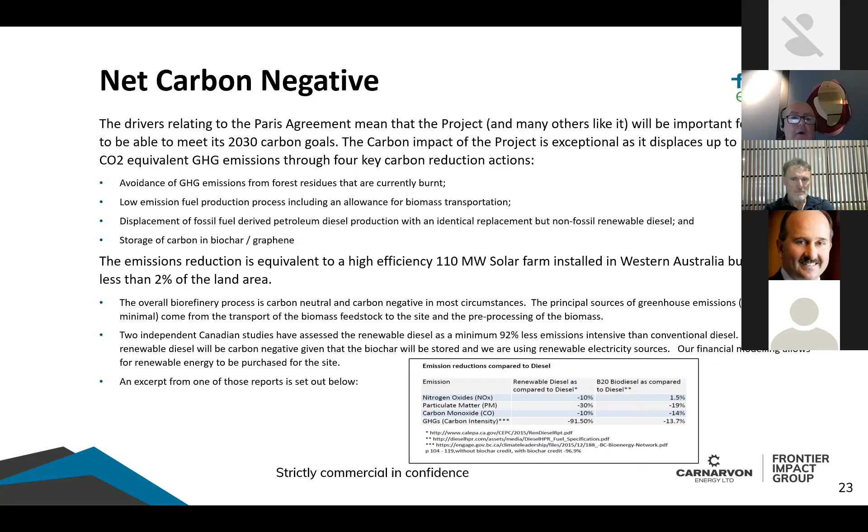To get carbon negative, it also relies on the fact that we're using renewable electricity for the electricity consumption on the plant, and also that we're producing biochar, which is going to be sequestered - either going back into the soil as a soil amelioration, or being used as a product, for example in graphene, or in the production of cement, which in turn reduces cement usage. I'll come back and talk about that a bit more.

The technology itself - I'll talk to it really quickly. The biomass comes in, say in the form of pellets or wood chip. We basically run them through a pyrolysis process. Pyrolysis is effectively a process where you thermally heat a material up, but there's no oxygen there, so it doesn't combust per se. Instead, when you burn wood in a combustion process, the carbon combines with oxygen, produces carbon dioxide, and also produces ash.

So in our process, there's no oxygen, and effectively the carbon comes out as carbon. It doesn't form carbon dioxide, so most of it comes out as biochar. So 15% of the biomass going in comes out as a 90%-plus carbon product.

In the pyrolysis process, it also produces a gas - a synthesis gas, or syngas, as it's commonly called - which has two components: a condensable, which you can convert to liquid, and a non-condensable, which you can't. The condensable stream contains two things: diesel molecules and a water-based product. So you've got a water-based product, and you've also got renewable diesel.

And that's one of the big things about this technology - you don't need a catalyst like Fischer-Tropsch does to produce diesel. It actually operates at a temperature of 1100 degrees C, which has enough energy in it to produce diesel molecules in its own right.

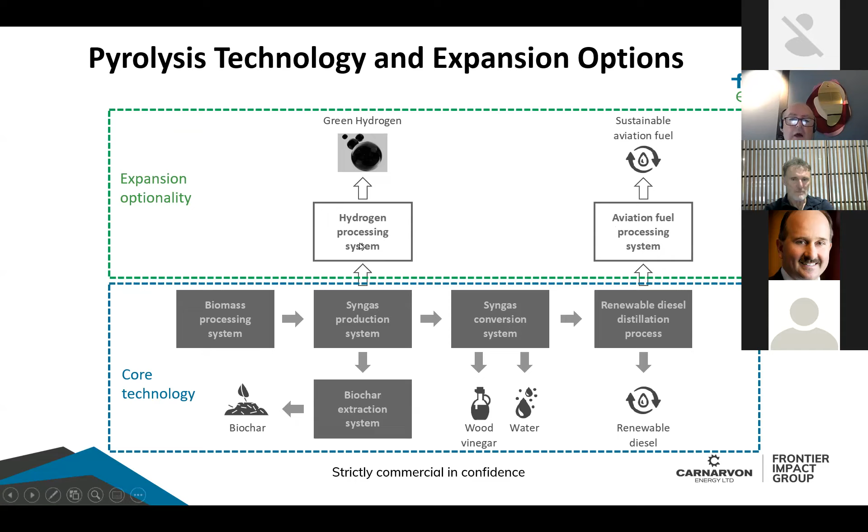So we can upgrade our renewable diesel to sustainable aviation fuel. The other thing we can do is obviously convert to hydrogen. If the market gives us that situation, we've got an incremental capital cost to either refine it further to produce SAF, or refine it at this level to produce hydrogen.

I'll just skip that slide for the moment in the interest of time.

For sustainable feedstocks, we can use a whole range. We can even use MSW in the technology, but we've avoided that at the moment because we're trying to make it a very clean environmental process project, and also support the regional sectors across Australia. Longer term, we'll be using the technology for MSW-to-diesel applications, but our primary focus is on forestry residue, branches, and stumps. We're not trying to cut down trees.

We're trying to make sure we've got a strong social license to operate and avoid issues and alarmist type press—I've seen people talk about koala killing and things like that in terms of using biomass for this type of process. Those are quite extreme reactions, but we're making sure we're very sustainable, using residues, or actually growing purpose-built energy crops, or taking advantage of agricultural residue. That's our focus, to make sure it's sustainable and long-term viable, both economically and environmentally.

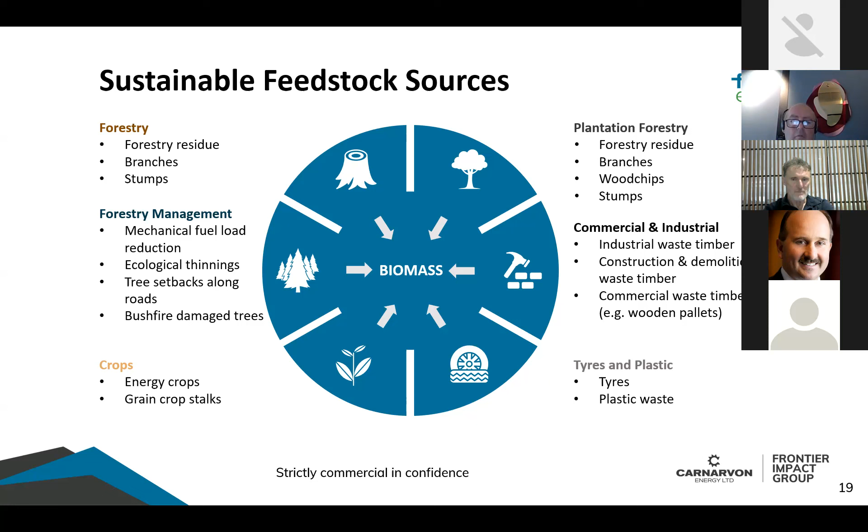A number of other energy crops can be used. I've spoken about oil mallee briefly—that's good in a low rainfall area, and also helps lower the water table by using oil mallee.

There's a number of other energy crops that can be used depending on the region. Some of these can be used as transitional crops as part of a rotational crop process, and will provide a long-term viable income stream for those energy crop producers, or we'll produce our own energy crops ourselves.

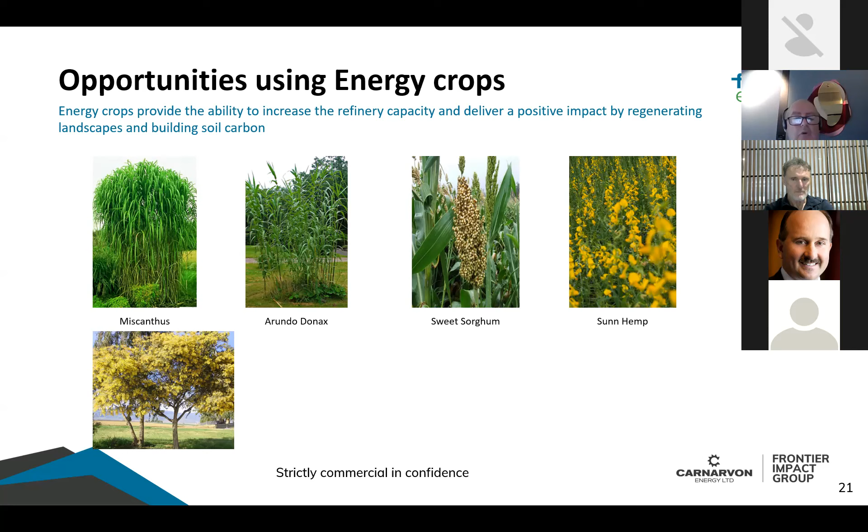Once you start talking about energy crops, you get into the argument of fuel versus food, and we're very conscious of that. So anytime we're using energy crops for fuel as opposed to potential food, we're looking at using the energy crops on marginal land that isn't suitable for food production.

There are benefits for farmers too, and once again these are regional projects. Certainly in Narrogin, we're doing a lot of work with the local farming community. We've started doing a lot of work in that area, and we will continue with our other regional projects as we roll them out across Australia.

First of all, it provides a market for crop residues. Not all crop residues are suitable—if they've got a high ash content, it doesn't produce as high quality biochar. But we can still use it, it's just not optimal from our perspective.

It also provides farmers the opportunity to earn additional income through energy cropping if they've got marginal land. We've got a number of models around that—we're happy to lease the land and grow our own energy crops, or we're happy for farmers to produce energy crops and we'll harvest them and pay a price, or we'll make a payment for them to deliver the energy crops to the door, giving them a long-term payment stream for that energy cropping.

We're also producing biochar, so we've got the ability to provide back the biochar to improve soil carbon levels, nutrient retention and water retention in soils, and also wood vinegar. This enables farmers to rehabilitate degraded farmlands by planting energy crops—for example, oil mallee, which improves salinity and local hydrology. We can also support farmers in delivering soil carbon and plantation carbon projects, so they get carbon benefits out of their projects as well. We're looking at a very circular economy, a very holistic solution for regional Australia.

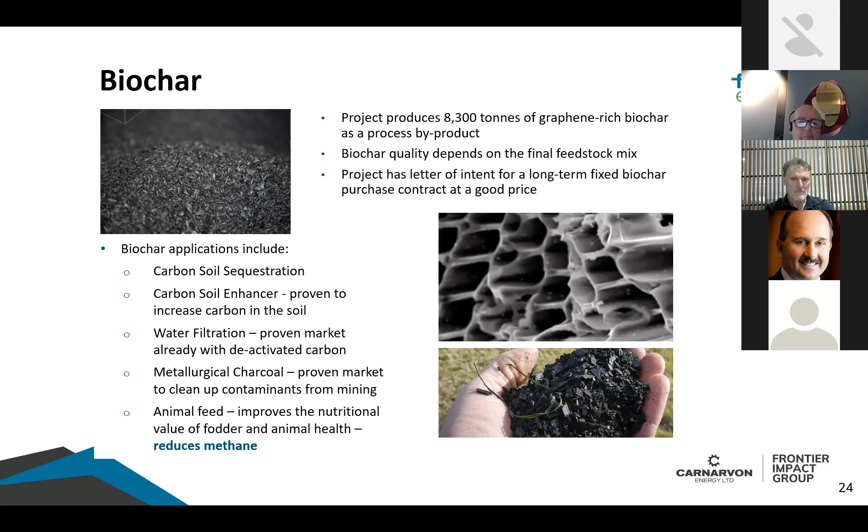Our biochar has significant graphene-like properties and can be upgraded to about 90% in one process and up to 99% in others. Graphene is currently produced predominantly from mining graphite and then upgrading through various chemical, electric, and exfoliation processes—and it's very expensive. We can produce graphene from our biochar equivalent to the highest grade, and it's renewable. We've basically produced a renewable graphene that doesn't involve mining or chemical exfoliation, with properties equivalent to that graphene, for a fraction of the cost. So we're moving very strongly into that area.

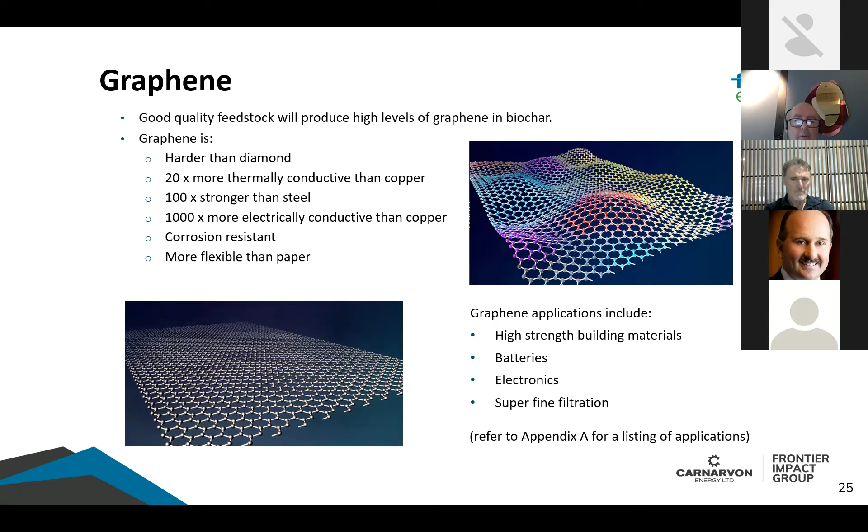I'm not going to go into graphene too much given time constraints, but one issue with electrification replacing renewable diesel is the need to implement and produce batteries. By having graphene batteries, we help the electrification side of things as well. So our project not only produces renewable diesel that displaces diesel, it also helps produce batteries that will help displace diesel in the longer term. The graphene batteries have all the properties you can see on there—higher energy density.

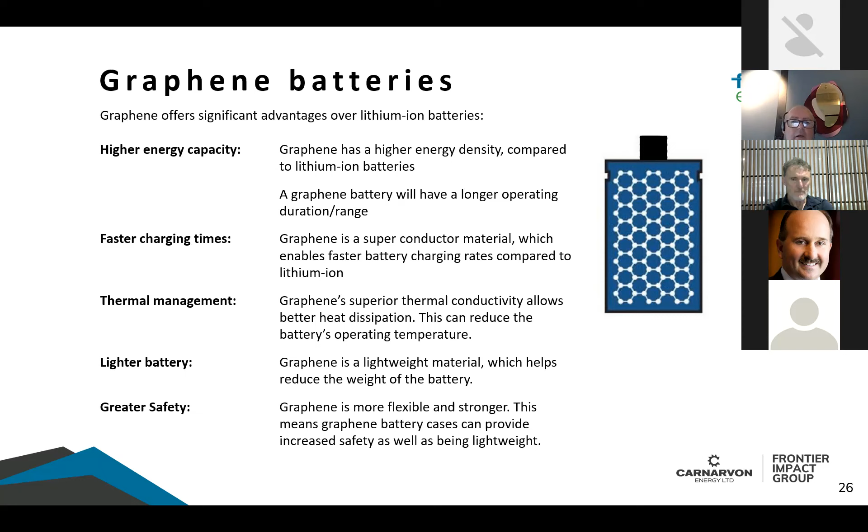To give you an idea of one of the most exciting things: graphene has a larger gap between each atomic layer. So it can fit sodium ions into spaces, whereas a traditional electrode requires lithium atoms to go between the spaces. The larger space between graphene layers allows sodium ions to potentially replace lithium, and sodium is the 4th or 5th most common element in the world. So if we can develop a sodium graphene battery, it will become a much more sustainable and more readily manufacturable, scalable battery technology. We see that as a long-term advantage of graphene.

Wood vinegar is another valuable byproduct, also called pyroligneous acid. People ask me what it is, and the easiest way I describe it—as it was described to me once—is that when a bushfire comes through and seeds germinate, people say you need the fire for the seeds to germinate. But it isn't the fire that causes it, it's the actual smoke. So I refer to wood vinegar as liquid smoke, and that liquid smoke has many uses. It's used... it's not used as a fertilizer.

It's a fertilizer enhancement. What it does is increase the uptake of fertilizer, and so it actually reduces the amount of fertilizer you use.

We were doing a presentation to a group the other day, and one of the guys was a fertilizer representative. He jokingly said he wasn't very interested, since it's going to mean he'll be selling less fertilizer if we use wood vinegar.

Wood vinegar, especially in the initial stages, especially if you're using fertigation, if you put wood vinegar in there, you'll actually reduce the amount of fertilizer you need to use.

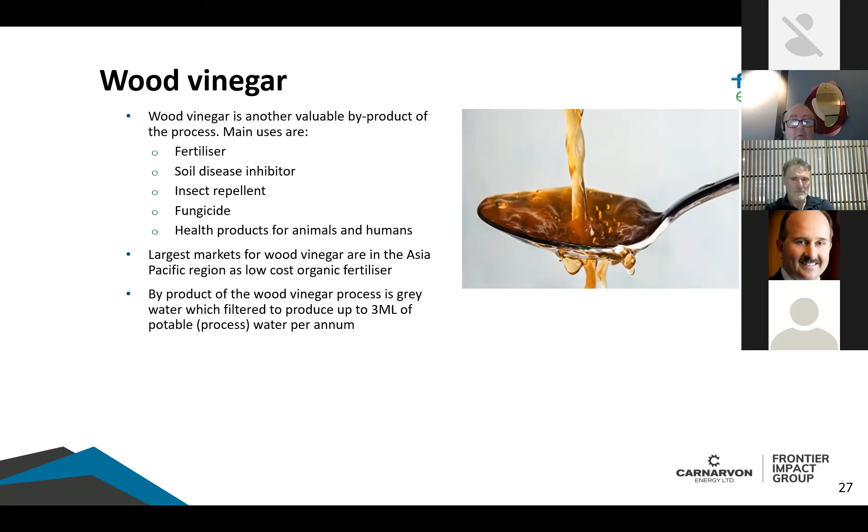It's also a soil disease inhibitor, an insect repellent, a fungicide, and has been used historically as a health product for humans and animals in a very diluted form. We produce a lot of wood vinegar as part of our process, and there's a significant opportunity to feed that back into the agricultural sector to help with reducing fertilizer and promoting crop growth.

Our challenges at the moment, and these are just some of them, not in our project development but around renewable diesel, are that there's no renewable diesel standard in Australia. There's no actual definition of what renewable diesel is, and we'll be the first producers of scale of renewable diesel.

So we're taking a fair bit of time and action trying to actually create a renewable diesel standard. We're starting to try and drive that, and we've had support from a number of sectors in trying to develop it. I think there's a recognition there.

And it's not just for us - companies like Neste, et cetera, can't meet the Australian diesel standard, and they're not recognised as renewable diesel either. So that's number one of the things we're working on at the moment.

There's no financial incentives for renewable diesel. It doesn't even get excise relief in the same way that biodiesel does. We'd love an incentive like the US has got in terms of a producer tax credit to produce renewable diesel. That will make a huge difference both for the economics of our project and also the price at which we can sell it to the public.

The other challenge is the current on-road diesel standard - the Australian automotive fuel standard for automotive diesel. It doesn't recognise lower density fuels as being eligible. When we did testing, our renewable diesel met all the requirements of the Australian standard except density, and it would actually meet the US standard, the ASTM D975, I think it is.

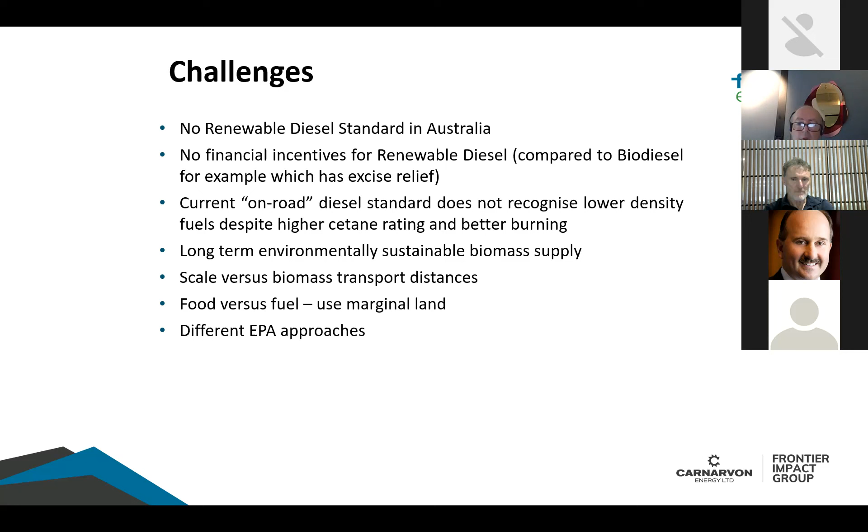So our current project, we're looking to start first production of the first unit in late 2023. We're expecting FID later this year. We're going through the EPA approval process, and we expect we'll have full commissioning in early 2024.

And yeah, that was about it for my presentation today.

Great stuff, Mel. One of the questions still remains is getting it live in the country, isn't it? To have a litre of renewable diesel would be a lovely thing. Being first is not very easy, John, that's all I can say. Yeah, but hopefully we'll get there.